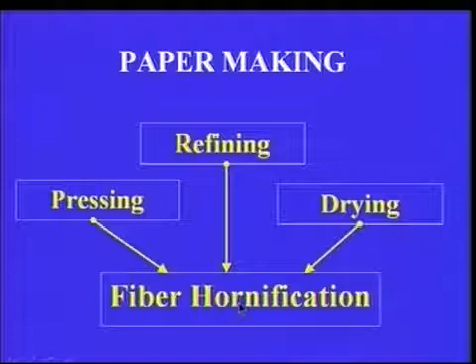What happens to the fibers in the recycled paper once they've gone through pressing, drying on the paper machine, and prior to that refining? Once fibers have gone through these operations, they get hardened, or what we call hornified, a phenomenon known as fiber hornification. So when you try to make paper again from these fibers, you don't get as strong a paper as it was before. You cannot restore the fiber structure like it was before refining, pressing, and drying.

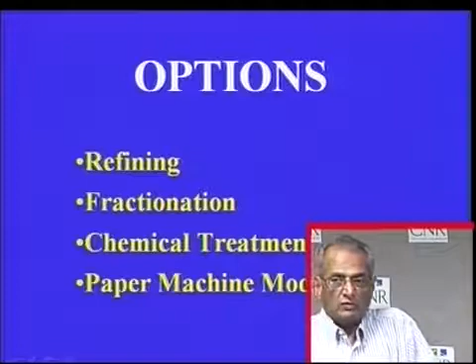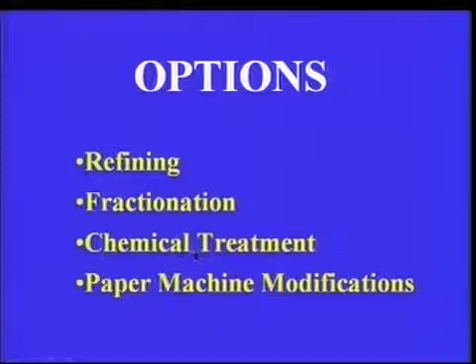So what can we do to improve the properties of the paper, particularly the recycled paper? The options available to the paper makers include refining, fractionation, some form of chemical treatment, or in some cases you can modify the paper machines also.

We will primarily focus on fractionation, but just to go over refining a little bit, what can we do to improve the properties of paper via refining? The idea here is to fibrillate the recycled fiber by going through gentle refining and not very harsh refining. Harsh refining leads to less fibrillation and more fiber cutting, which is detrimental to the final paper strength properties like tensile and tear strength and burst strength and compressive strength.

So what we want to do is to take the recycled fiber and do very gentle refining so that it results in more fibrillation and less cutting. This is generally achieved by using narrower bars, higher RPM, higher consistency to the extent possible, and somewhat larger bar angle to get relatively gentle refining.

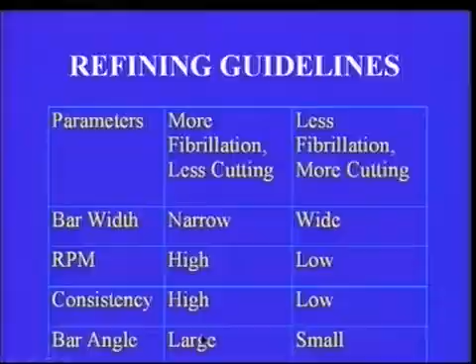Here is an example of gentle refining versus harsh refining. On the x-axis, I have Canadian standard freeness, and on the y-axis, I have ring crush, for a mixture of 80% OCC and 20% mixed pulp. When we go through somewhat harsh refining, freeness drops rapidly, but you don't develop as much strength. We started out with a freeness of about 430-40. Then as you refine it, the freeness decreases and ring crush increases.

If you go through gentle refining, you can see that we can improve the properties much more rapidly without too much drop in the freeness. In other words, for a given freeness, we can have much higher ring crush, and that is good for the paper machine productivity.

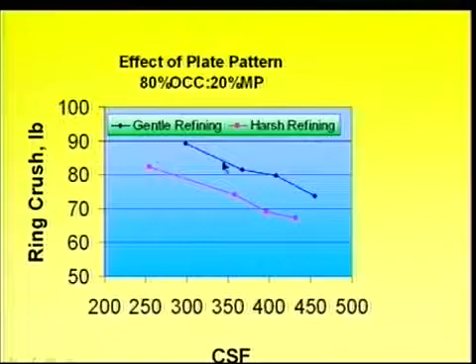Here is an example of high consistency refining, and by high consistency we mean refining around 30% consistency as opposed to conventional low consistency refining where the consistency is between 3 to 4%. The energy consumption in high consistency refining is pretty high, and the benefits are usually not that much. So only in very special conditions would we recommend the use of high consistency refining: when you need a stretchable sheet or when you need curled fiber. When you have too many shives in the pulp or too many fiber flakes, high consistency refining might be beneficial.

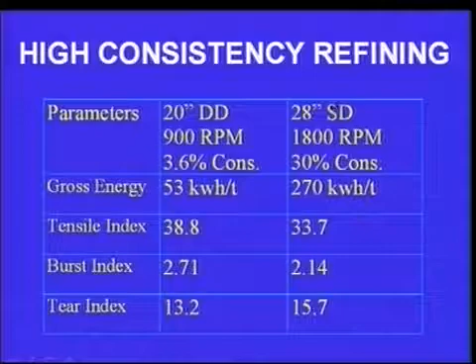Here is a summary of high consistency refining. It's relatively expensive because you have to raise the consistency of the pulp, so you need some kind of dewatering mechanism followed by a mechanism to supply this high consistency pulp to the eye of the refiner. Energy consumption is relatively high, but it does preserve the fiber length and give you somewhat higher tear strength.

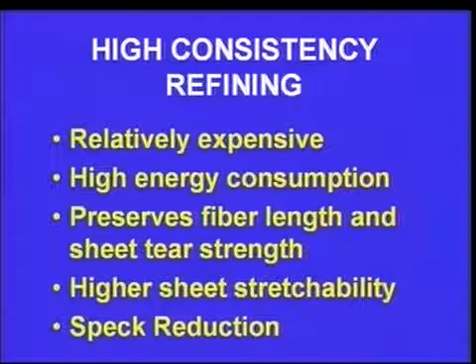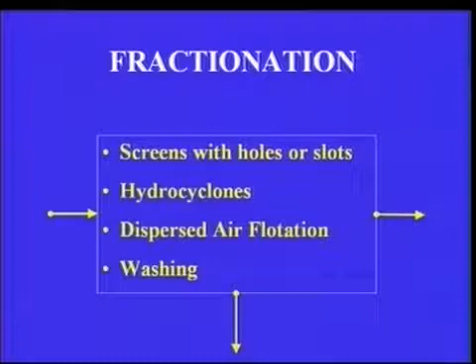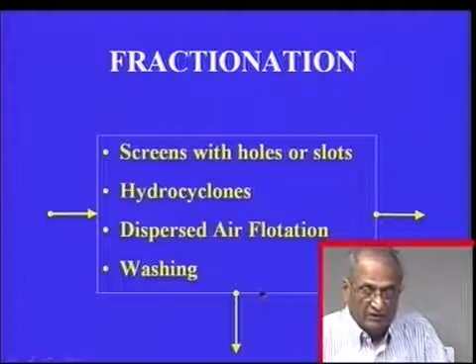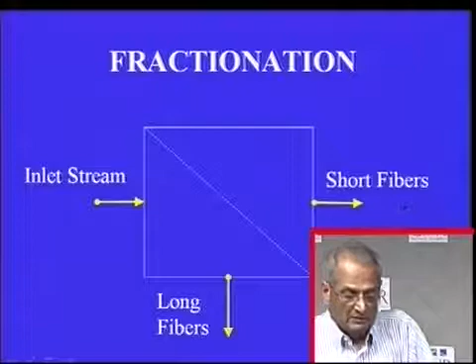With regard to fractionation, there was a very good editorial in the May 2003 issue of Progress in Paper Recycling that described various aspects of fractionation. Some of the equipment that can be used for fractionation include screens with holes and slots, hydrocyclones, and dispersed air flotation, which is used in de-inking and washing processes. So basically, when we talk about fractionation, we want to see the feed stream divided into two fractions, one containing relatively short fibers and the other containing proportionately larger amounts of long fibers.

Why do we want to fractionate like that? The reason is that we can do separate refining of the long fiber, or we can use short fiber and long fiber in different layers of the same board, on a multi-layer board, for example.

Alternatively, we can employ long fiber in a liner board and short fiber in a corrugating medium, particularly useful when both liner board and corrugating medium are made at the same location. We can use long fiber in the liner board machine and short fiber on the medium machine.

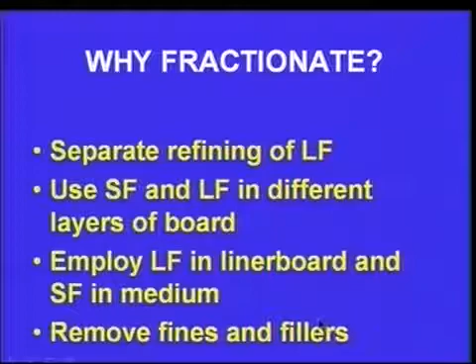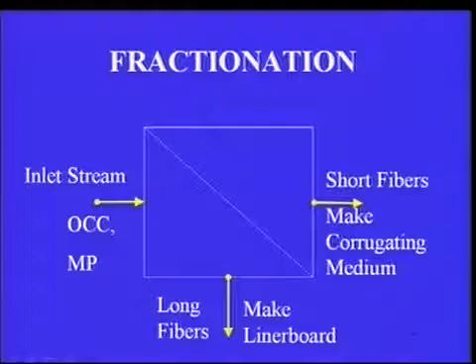Finally, we would like to fractionate to remove fines and fillers that may not be very useful, improving paper machine productivity that way. Here is one example of the application of fractionation, where you take a mixture of OCC and mixed paper, using the short fiber for corrugating medium and long fiber for liner board.

Another example is when we have a pulp with Canadian standard freeness of 400 and refine it to 240 freeness using net energy of about 6 horsepower day per ton, giving a tensile strength of 5.25 km and tear factor of 8.16.

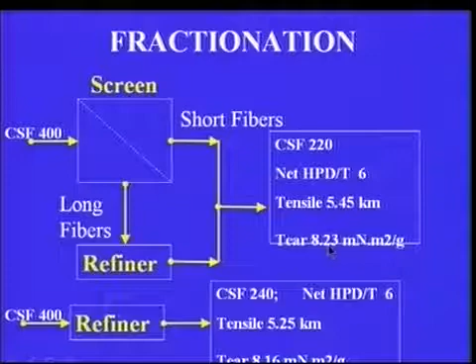Again, if I go through fractionation and refine only the long fibers to a final freeness of 220 using the same energy consumption, my tensile strength is now 5.45 and tear factor is 8.23. So a small benefit of refining the long fibers separately.

Another way to fractionate is by using hydrocyclones. When a fiber-water mixture goes through a hydrocyclone, the underflow contains mostly unrefined, non-flexible fiber, debris and stiff material, whereas the flexible fibers and fines go through the overflow together with low density contaminants, for example.

So in general, you are able to separate flexible fibers and stiff fibers: stiff fibers go through underflow and flexible fibers go through overflow. Fiber density is greater than that of water, so in general you will have higher consistency in the underflow and lower consistency in the overflow compared to the feed consistency.

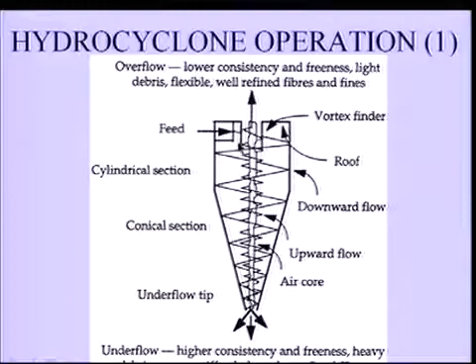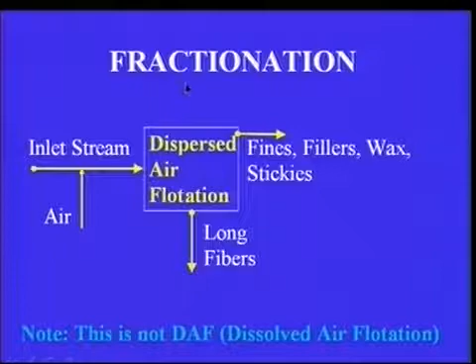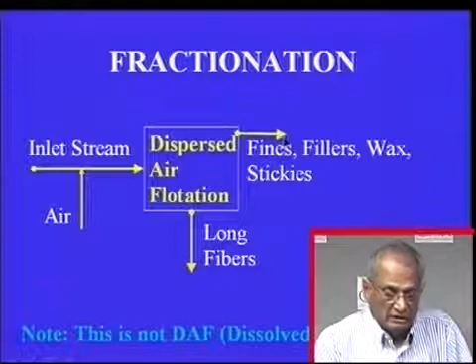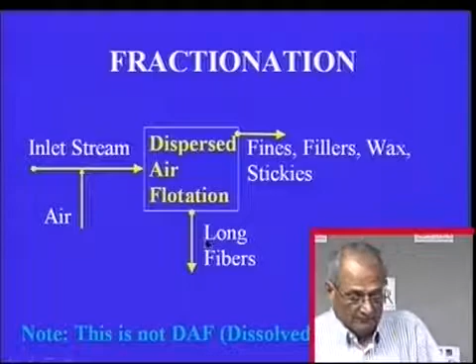Dispersed air flotation is a good way to fractionate the pulp also. In this particular case, fines, fillers, wax and stickies are largely floated out and could be discarded or used for other purposes, and the long fibers that remain can be used for making reasonably good quality paper. So dispersed air flotation can be useful in fractionation.

Should point out a slight terminology distinction here: dispersed air flotation used in de-inking versus dissolved air flotation used in water clarification. The separation mechanism is different. Dispersed air flotation is selective separation, whereas in dissolved air flotation we want to remove all of the suspended solids from the water.

Surface chemistry plays an important role in dispersed air flotation, whereas flocculation and coagulation mechanisms play a role in dissolved air flotation. Bubbles are usually quite large in dispersed air flotation, but very small, about a micron or thereabout, in dissolved air flotation. In fluid dynamics, we have somewhat turbulent conditions in the dispersed air flotation cell to prevent the fibers from floating out, whereas in dissolved air flotation the conditions are relatively quiescent, so that bubbles can coagulate with the suspended solids and float out all the material.

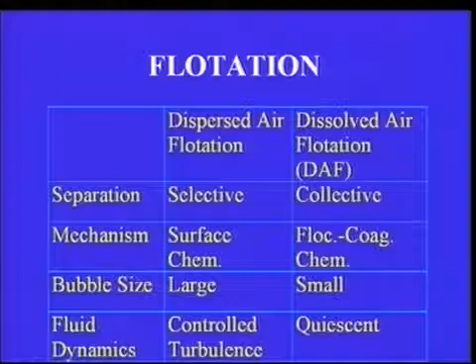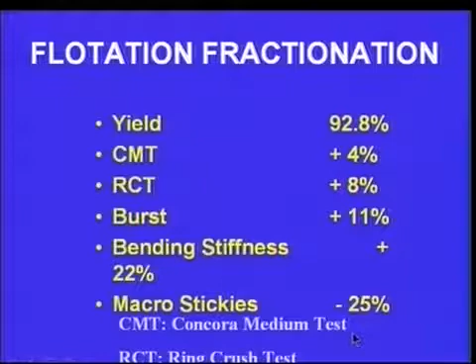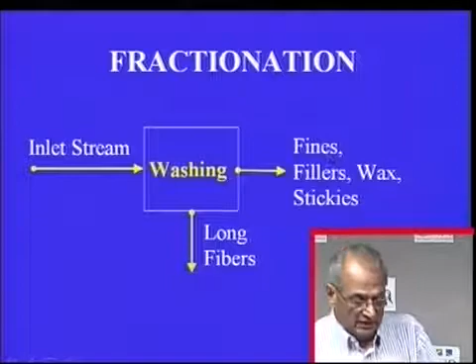Washing can be looked upon as a fractionation because again you can remove fine fillers, wax and stickies, and long fibers are retained.

Some question about the definition of fines and the usefulness of the fines. So we say that material that passes through the 200 mesh screen, or smaller than 72 micron, is classified as fines. And we like to identify between the primary fines and the secondary fines, or the so-called dead fines, which are not very useful, compared to the live fines, or the useful fines.

So when you go through the pulping operation, the amount of fines present in the pulp is what we classify as the primary fines, and those are not very useful in improving the strength properties. After removing the primary fines, you go through the refining operation, and the amount of fines generated are called the secondary fines or the live fines, and those fines are quite useful in improving the sheet strength properties.

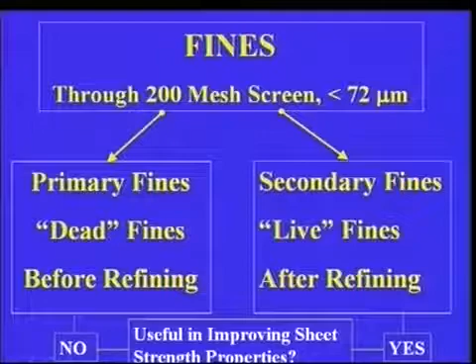So you don't want to throw out the secondary fines, they are very useful. So you want to carry out the washing or flotation operation before refining. Remove the primary and the dead fines together with the stickies and other material. Then we go through the refining, and we want to retain these secondary fines as they are useful in improving the sheet strength properties.

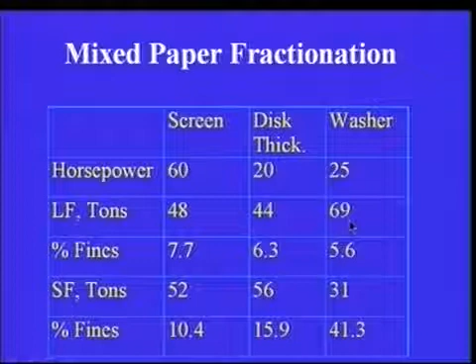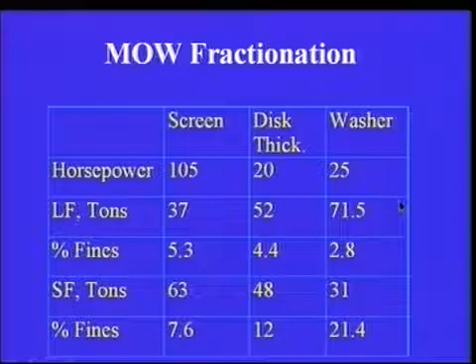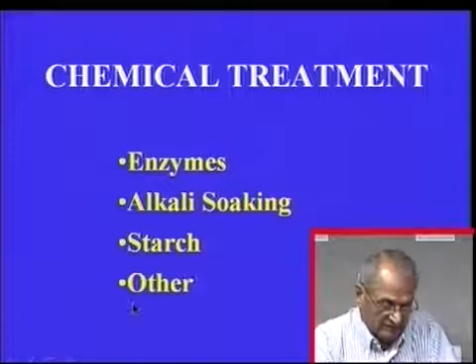Chemical treatment to improve the paper properties include enzyme treatment, alkali soaking, starch, or other methods. Enzyme can be useful in improving the strength properties, as they can consume some of the fines and convert it into glucose, for example, and long fibers can be refined and made into paper.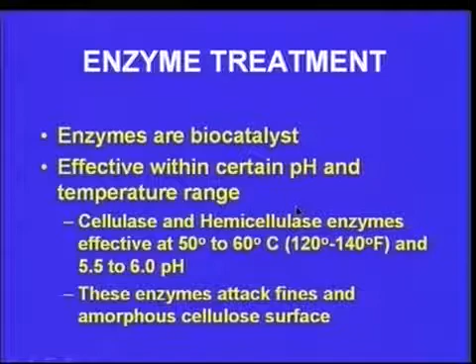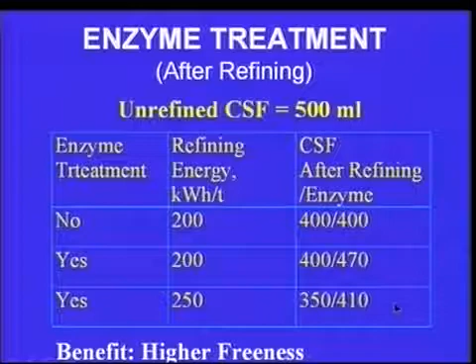Here is an example where we use higher energy following the enzyme treatment, after refining and so on. So there are various ways of using refining and enzyme treatment to achieve desired result of either energy saving or improving the paper properties.

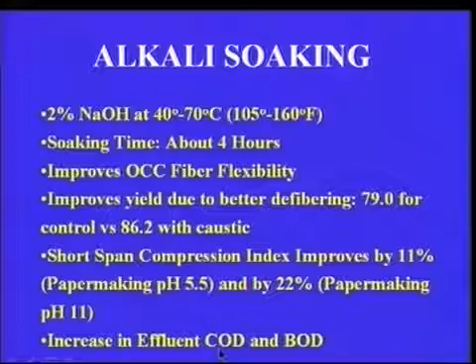Some people have shown that alkali soaking can help in improving the paper properties. Alkali helps improve, swell the fiber and make them somewhat more flexible so that they can conform to the neighboring fiber better and we can get a stronger sheet. But there are a lot of other downsides to alkali soaking, particularly it increases the effluent COD and BOD among other things.

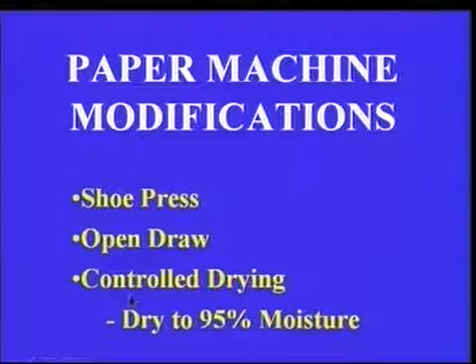And lastly, some people say that paper machine modification to have an open draw can improve the stretchability of the paper, but we don't have specific data on that.

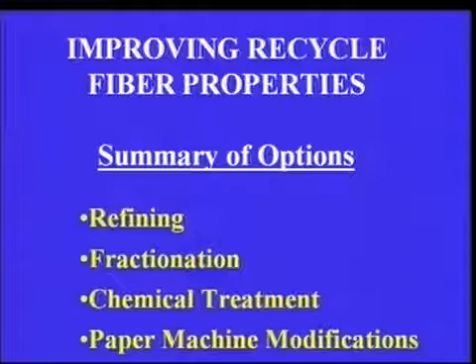In general, several ways of improving recycled paper properties include refining, fractionation, chemical treatment, and paper machine modification. And primarily by fractionation, we can improve the property by separating the long fiber and short fiber and applying refining to long fibers, and/or using the two fractions into separate layers or separate paper products, linerboard and medium, for example.